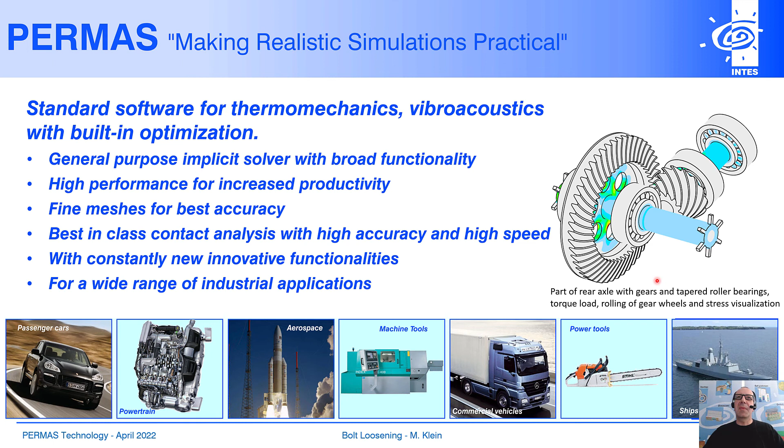Back to the presentation, I would like to start with a short motivation and the objectives, followed by an introduction of bolt loosening based on the NAFEMS presentation from the World Congress in 2017. I would like to show a solution with a new feature set for bolt loosening. This new feature set is used for a multi-bolt model. I would like to show the loads and results of this analysis, and I will conclude at the end with some final remarks in the conclusions.

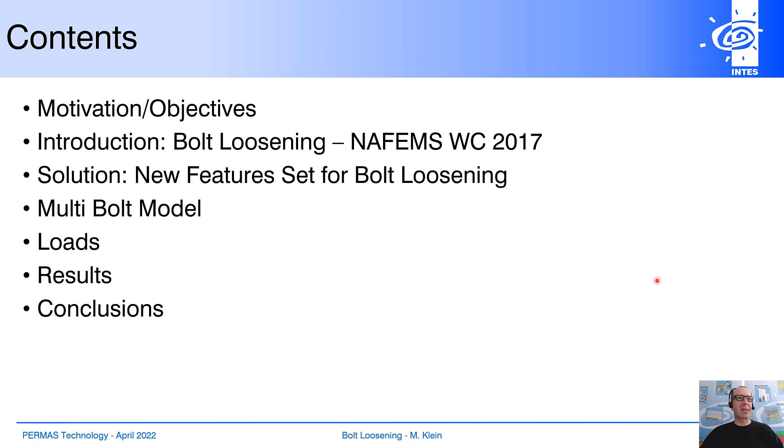The motivation for self-loosening is very clear. Self-loosening is typically mission critical. Bolt loosening of pretension during operation leads to structural failure. So the current understanding of bolt loosening is that bending is a very important trigger.

So we did a parameter study based on simulation and showed improved possibility to indicate self-loosening by simulation. With this presentation, the ultimate objective is to develop modeling techniques and indicators to predict bolt loosening in industrial multi-bolt models.

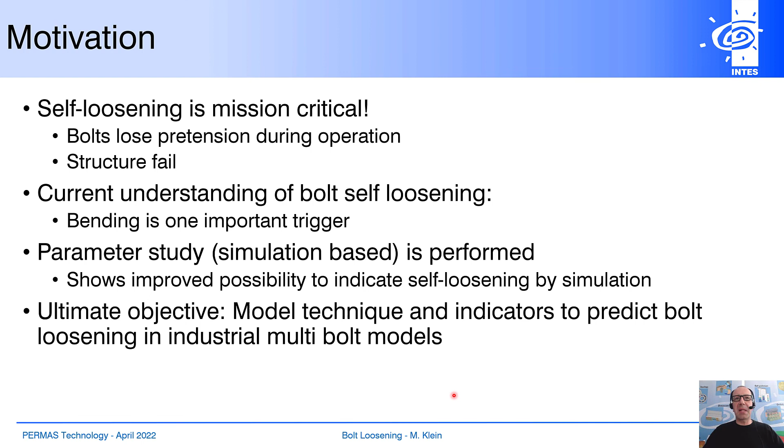So we came from single bolt models. INTES presented at the NAFEMS World Congress in 2017 a solution for this based on the Junker test. The Junker test is shown here on the right hand side, and the main thing is that bending of 0.3 mm is done at the bolt head in both directions, ongoing throughout the test.

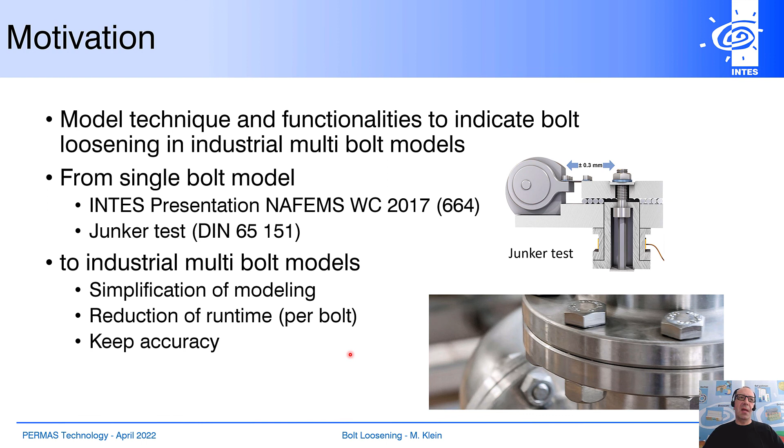We want to go to an industrial multi-bolt model with a simplification of modeling and reduction of runtime per bolt, but we want to keep all physical effects, and with that we want to keep the accuracy.

Here is the bolt model from the Junker test that we used in 2017. It's only one bolt, and we have an alternating bending load. On the left hand side you see the complete finite element model, but most interesting is the detail of the thread. We show here a picture of the bolt thread, which consists of a detailed mesh with a very huge number of elements, as you can imagine from this picture.

In this small movie you can see how the simulation is done with an ongoing, alternating bending load. We hide some element parts here, and now you can see that the contacts in the thread area are closing and opening, and so we get this bolt loosening in this model.

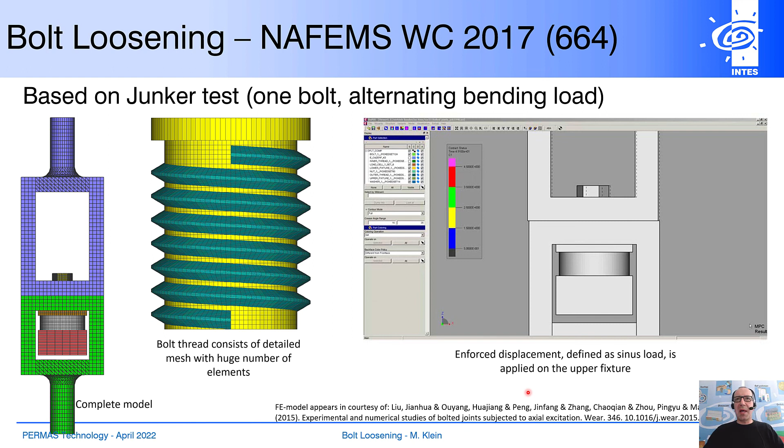I would like to show you some results from this Junker test. On the left hand side you see the pretension loss dependent on the friction coefficient, and with lower friction coefficient you get faster reduction of pretension. Nearly the same result could be shown by the rotation of the bolt head - you see the same effect, with bigger rotations for lower friction coefficients.

So we concluded that loosening could be shown by simulation, and to use this for multi-bolt models we need further developments. We need modeling and simulation effort to be reduced for this type of model, and we want to keep the detailed physics behavior at the thread and bolt head so that we have the same effects for the multi-bolt models.

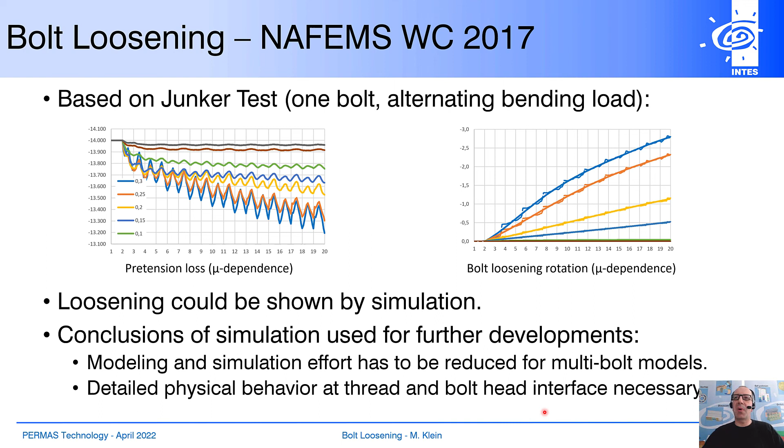So at the beginning I want to show the new feature set for bolt loosening.

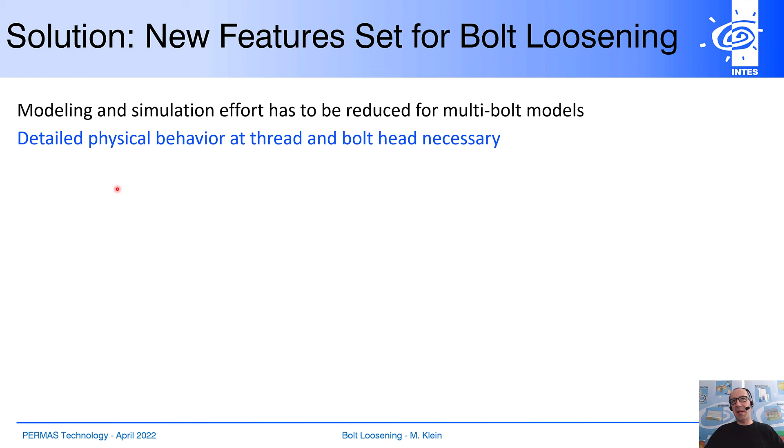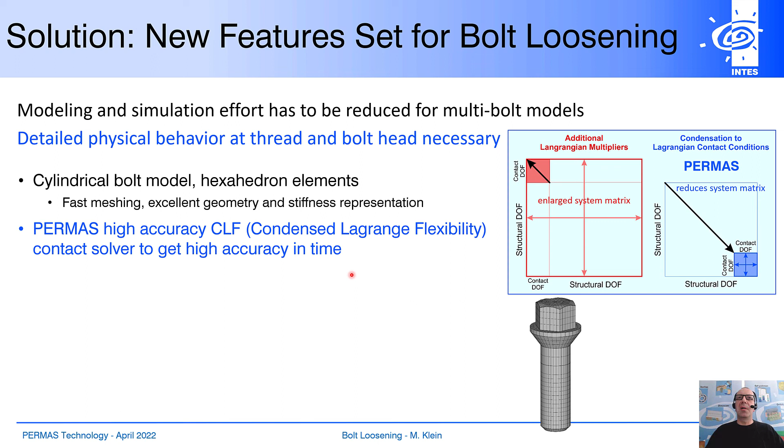So the detailed physics behavior at thread and bolt head are necessary, so we keep that, but we want to reduce the modeling time, so we want to have a cylindrical bolt model, mainly by hexahedron elements like shown here in this picture, so you have fast meshing, excellent representation of geometry and stiffness, and then we add our PERMAS high accuracy CLF condensed Lagrange flexibility matrix contact solver to get high accuracy in time.

So the basis of this technique is that we don't add additional Lagrangian multipliers to the stiffness matrix. We do a condensation to Lagrangian contact conditions in PERMAS, so we get a reduced, very small system that is much smaller than the stiffness matrix. So this nonlinearity can be solved much faster in PERMAS.

But we want to have a multi-node contact in thread and bolt head area, that we get correct force directions and friction, including stick and slip in the thread area. To make it easier, we have a lot of inputs by parameter. We have as parameter the alpha, the pitch of the thread, we have the pretension force, the friction coefficients for sticking and slipping, and we can also add locally distributed clearance to represent bolt thread quality in each single bolt.

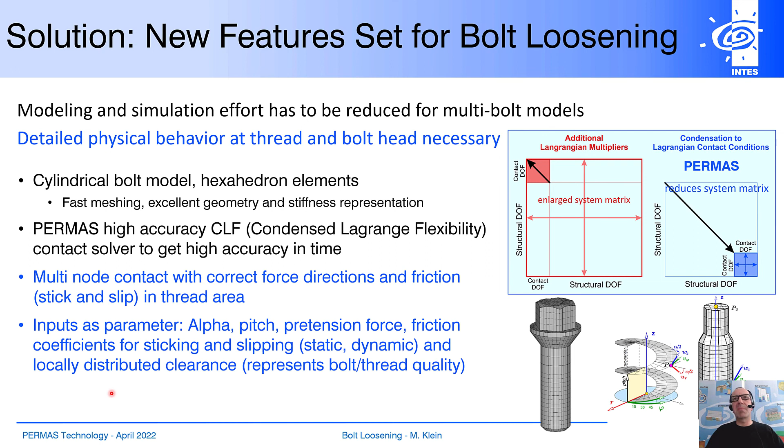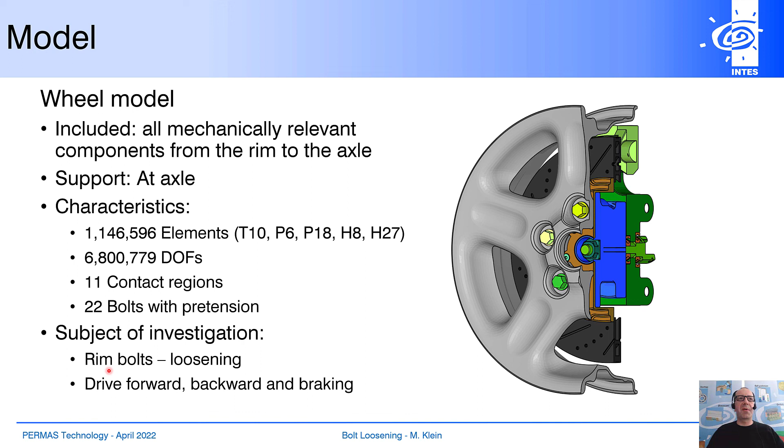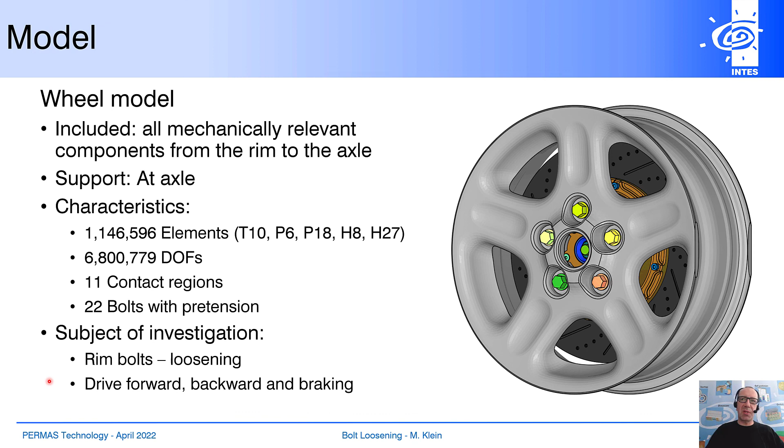The subject of the investigation are the 5 rim bolts to detect the loosening. We have different loadings, we drive forward, backward, and we have braking. So typical load during vehicle operation are the driving maneuvers, so forward, backward driving, this is most frequently the general effect on this rim. Then braking as a peak load, and also steering is one part.

A little remark: wheel on left and right side all have the same right-handed screw threads, so the effect will be different on left and right side. That we can expect. The loads are acceleration, deceleration and the weight. So for the simulation we use a fixed wheel and rotating load because this is much easier to use for the simulation. Here we used 6-degree steps for the simulation.

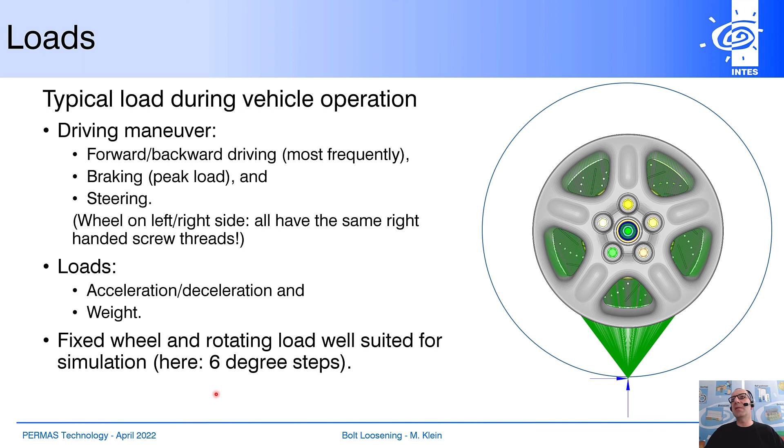The contact modeling of the bolt is very easy in this case. We have contact in the bolt head area between the bolt and the structure, and we have contact in the thread area of the bolt for exact threads. So we need for the bolt here only a linear hexahedron mesh, no helix mesh is required, no detailed thread.

This is all done by parameters. Recommended is that pitch is used as element height in the thread area, like shown here. And there are no restrictions for all other parts, so all linear, quadratic, volume elements and incompatible meshes are allowed. Meshing as required for good stiffness and geometry representation can be used as usual.

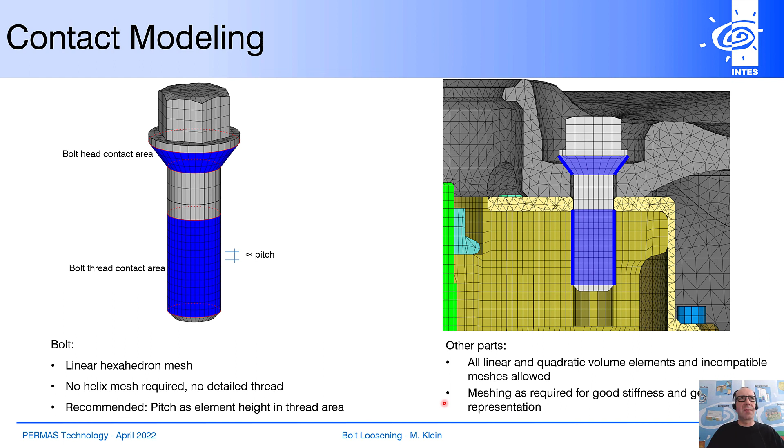Some additional words to the loosening process. The loosening process in detail is for typical connections: sliding does not occur in the entire contact area, this will lead to a sudden collapse. But we want to simulate the slow loosening. We have small moving slipping areas which are sufficient to crawl forward in a wave-like manner, like a caterpillar.

You see the same effect here in the simulation of a ball bearing, where we can see the crawling effect between the outer and the inner housing, and by the deformation you see when one ball comes after the other, we have this crawling here. You can follow the crawling by this blue line, and you see that the mesh of the inner housing is moving.

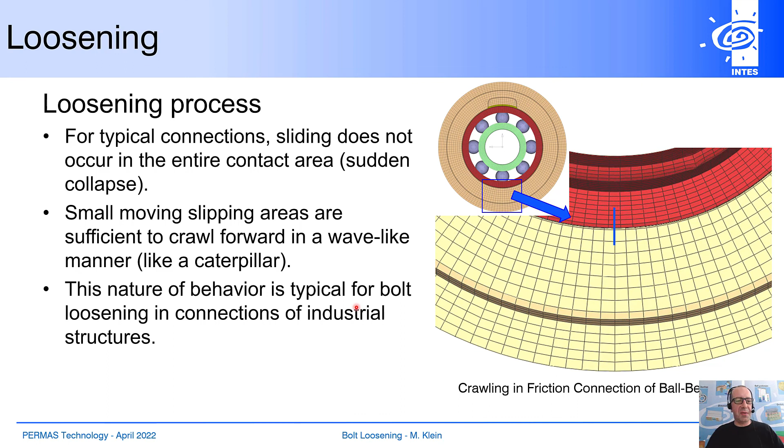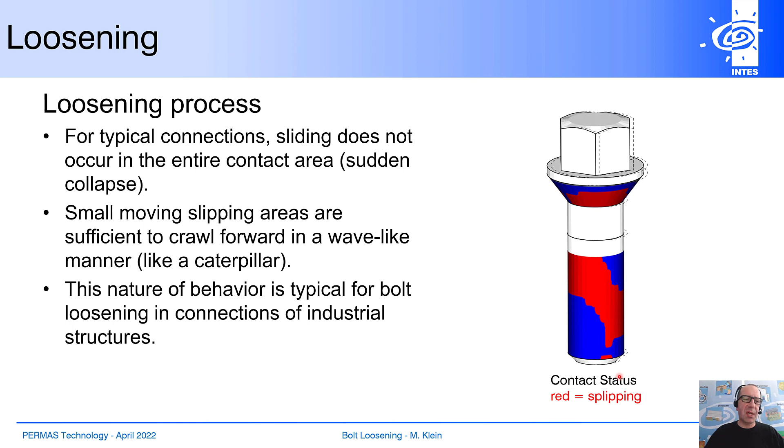This nature of behavior is typical for bolt loosening in connections of industrial structures. So we checked the sticking and slipping, here in red the slipping for the wheel rim model and the bolt thread and head area, and you see there is never complete slipping, but there are big slipping areas from top to the bottom of the bolt thread area, sometimes during the rotation of the wheel. So we can expect loosening.

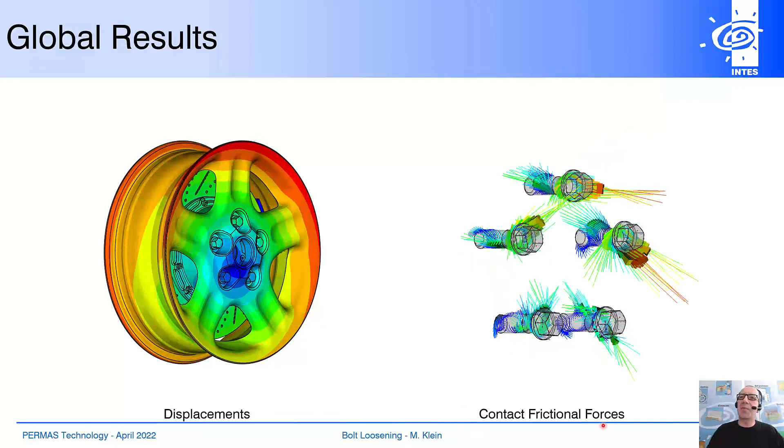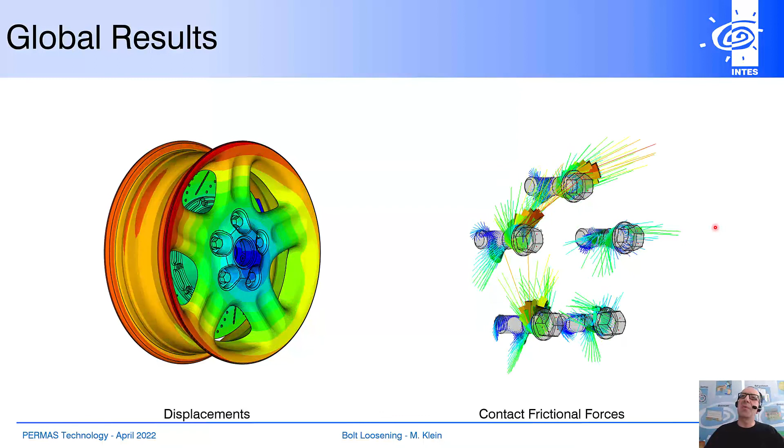Here you see the global results. At first on the left hand side you see the displacements, again with a fixed wheel, and so you see the displacements are rotating, and we also check here the contact friction forces between the bolt head and the structure, and also in the thread area, and we can follow all the frictional forces through the rotation of the wheel to check this.

So with the results at the bolt being very important, we check them more in detail. We get accurate contact results in correct directions, which leads to excellent prediction of the loosening process in both bolt head and bolt thread.

We see here the contact status in colors, blue for sticking and red for slipping, and it shows that loosening is possible. We have large sliding areas on the head and the thread, and several times the area of slipping in the thread extends from top to bottom.

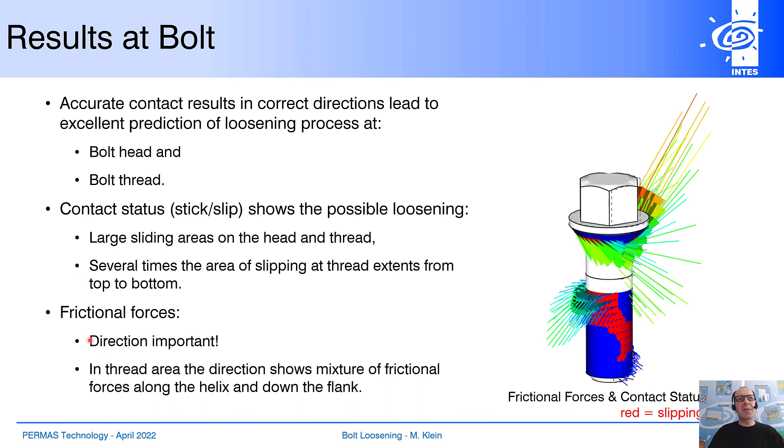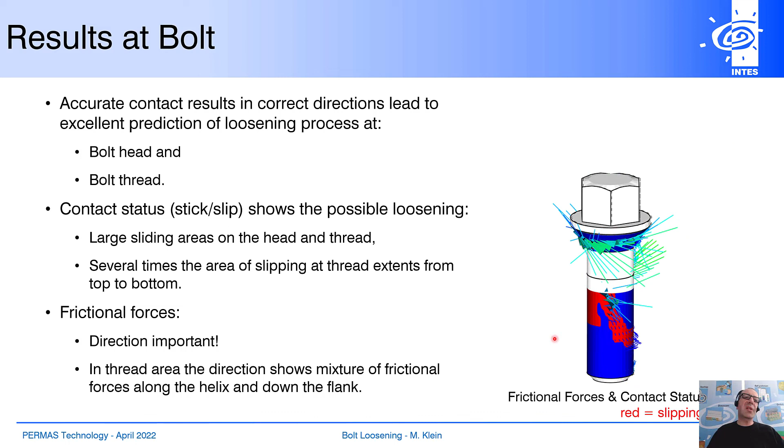We checked the frictional forces, where especially the frictional direction is important. In the thread area, the direction shows a mixture of frictional forces along the helix and down the flank, so it's a mixture effect caused by slipping.

The loosening can be shown by checking the rotation of the bolt during the simulation. Here is shown the loosening during forward driving for a friction coefficient of 0.15 and a pretension force of 20,000 for the first rotation. We observe all 5 bolts of the wheel, and the rotation of each bolt head is indicated for loosening.

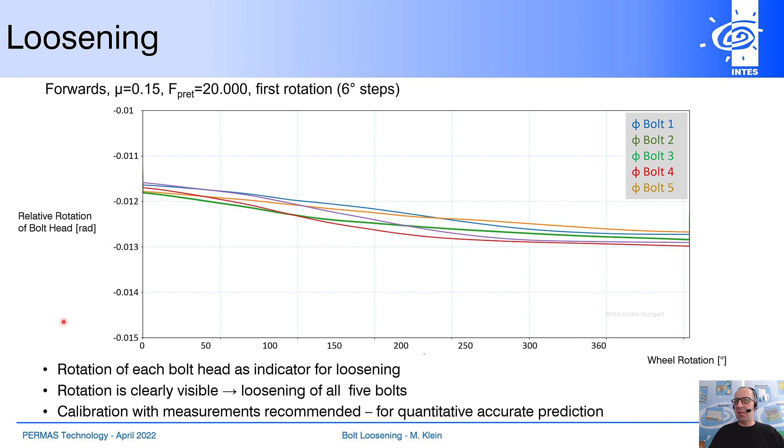We see over the rotation of 360 degrees that we have a rotation indicated here on the left hand side for all bolts. The rotation is clearly visible. We have loosening of all 5 bolts, but we have to calibrate this with measurements for quantitative accurate prediction.

If we want to check more rotations, here we checked 3 rotations with the same other parameters. We see that the most loosening happens on the first turn of the wheel, and then starting from the second turn we have a constant loosening with all subsequent wheel rotations. So we have the same behavior, for example for bolt number 5, repeated for all rotations.

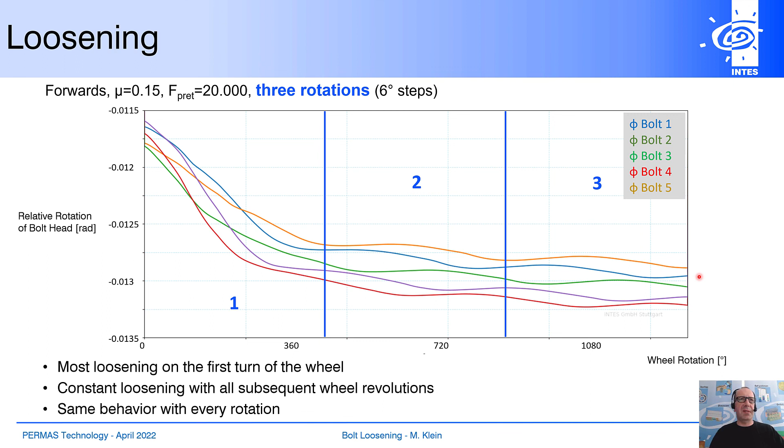If we compare different friction coefficients from 0.1 to 0.3, we can see that the new bolt model is clearly able to provide results for the different friction coefficients. The influence of friction coefficient is covered very well by the new bolt model. You have less bolt loosening with increasing friction coefficient, so no bolt loosening with a very high friction coefficient is shown by this model.

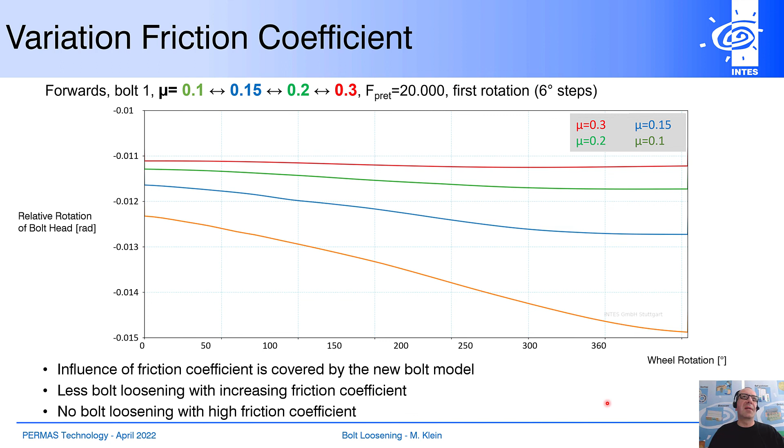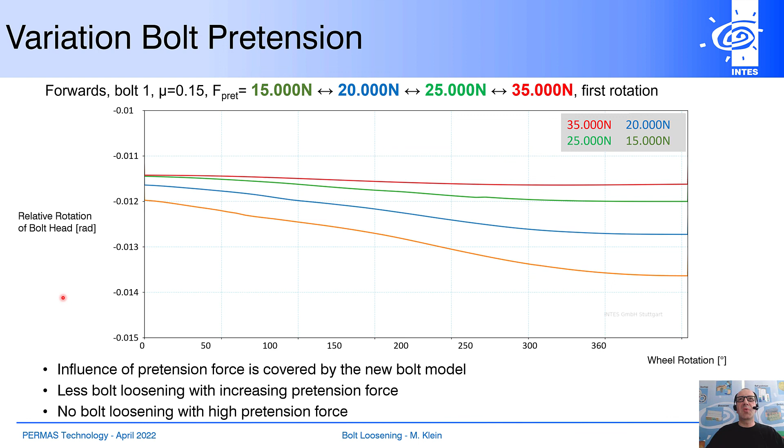The next parameter we checked is the bolt pretension from 15,000 Newton to 35,000 Newton, and this model is also able to show the influence of the pretension force. You see that you get less bolt loosening with increasing pretension force, so with the highest pretension force we have less loosening than with a low pretension force. This bolt pretension effect is also possible to be simulated by this model.

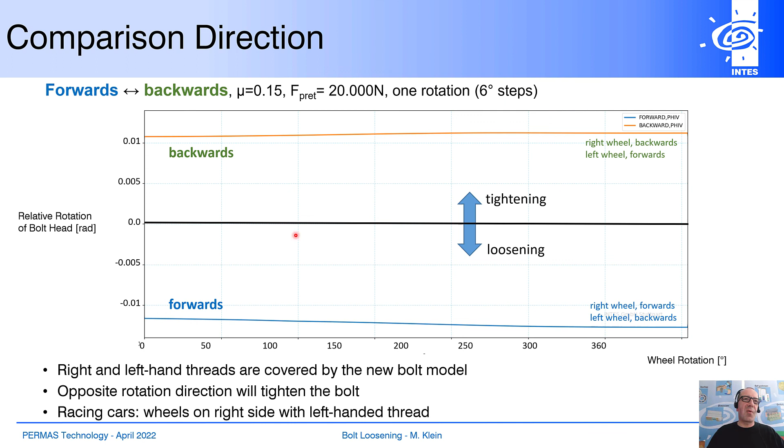Another effect I want to show is forwards, backwards, or right and left side of the wheel with the default parameters. We have checked this and found that for forward driving we have loosening, and for backward driving we have tightening. This effect is also part of our advanced model.